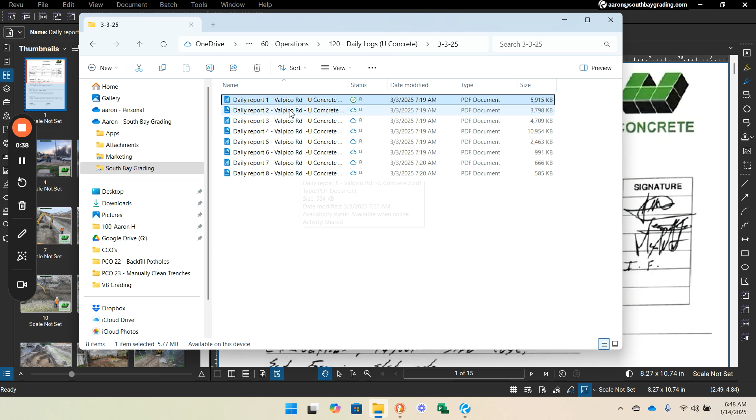It was an 8 working day job. He gave us a tag for every single day, labeled by work day, which is great. Here's his sign-in sheet - he's got the date, job number, names of employees, times in, times out, and employees signed.

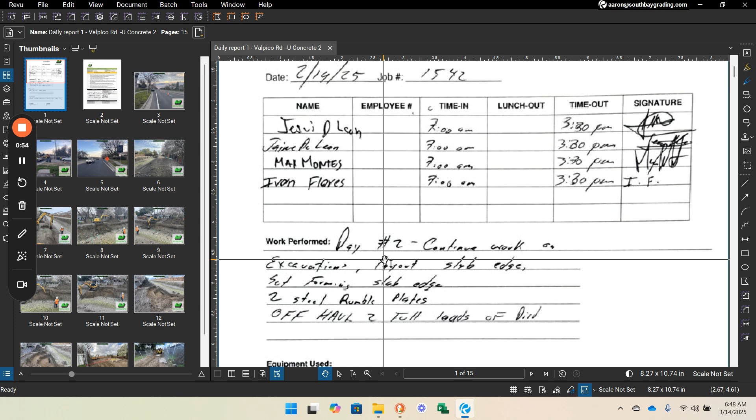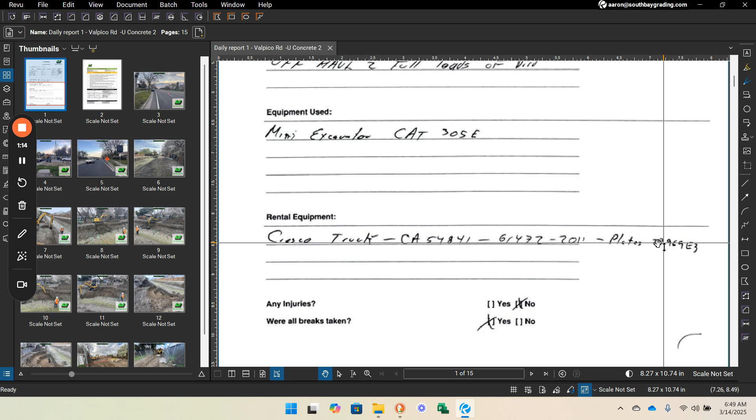This is work performed: continue work on excavation, layout slab edge, set form slab edge, steel rumble plates, off haul 2 loads of dirt, mini excavator. So he's got what he did, what type of equipment he had out there, and his rental equipment - he even puts the plate number on here, which is great.

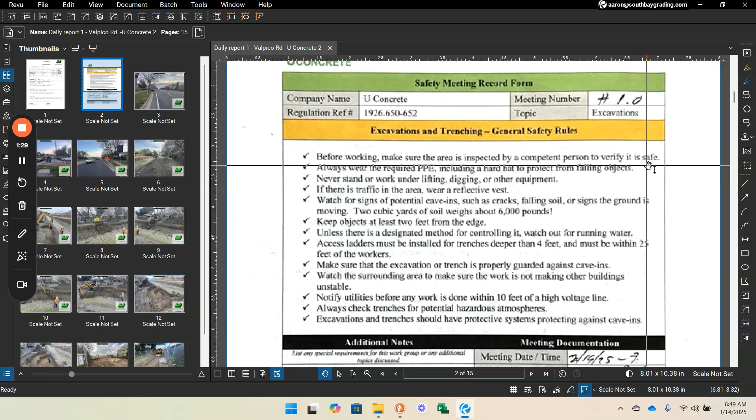Injury checklist, breaks taken, and here's his safety meeting right here. He went over excavations and trenching, which is relevant for what he was doing that workday. Meeting time and date, additional notes, all the guys signed it, and then he's got photos.

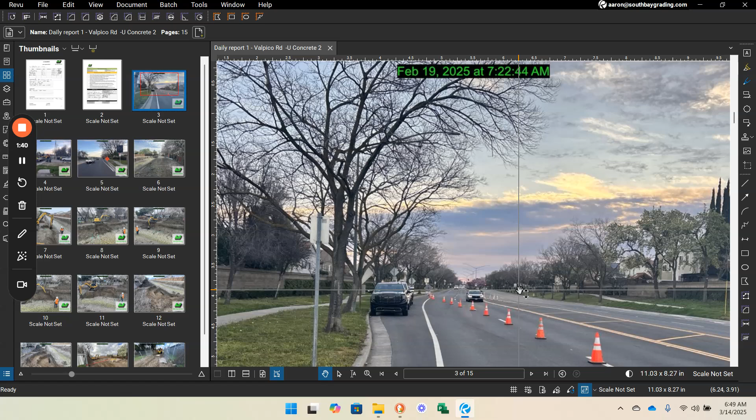So here's Valpico Road in Tracy. He's showing that he's got cones for a lane transition, bringing his equipment in - getting you everything you need to know.

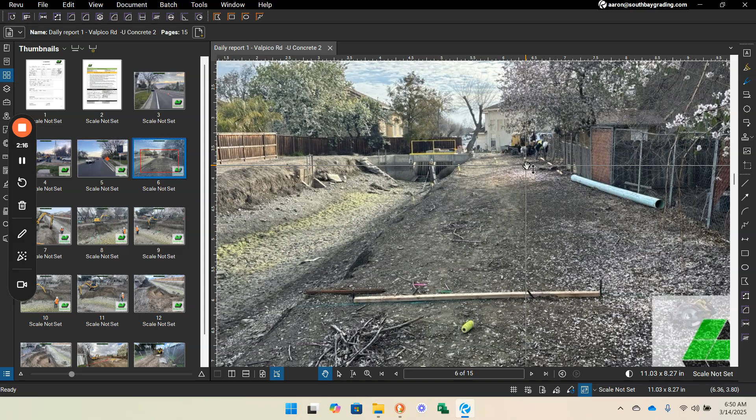Here's his area where we put basically one of these guys in right here, and then the drainage pipe. So when this thing fills up, water is going to flow in here and go across the street. I didn't have the plans, but I think they're basically going to use this rainwater runoff to feed the lakes over at the housing development across the street, which is kind of cool.

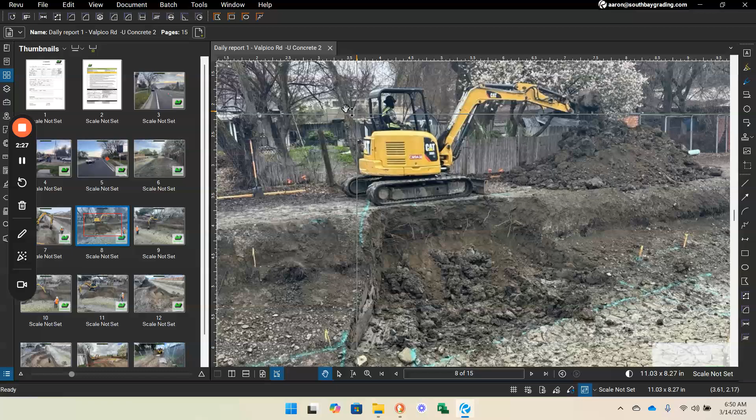So here's his guy cutting the slot out for the trapezoidal shaped intake structure. Hard hat, vest on - you can't really ask for much better than this.

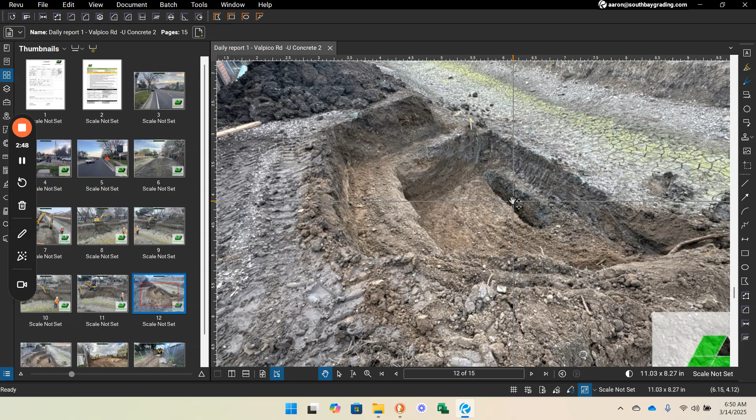Digging - hard hat, vest, got a guy down there checking the grade. And there's his slot. This is the footing or the slab, this is the footing hole, and then the walls come through here. So he's basically got his rough cut done in one day.

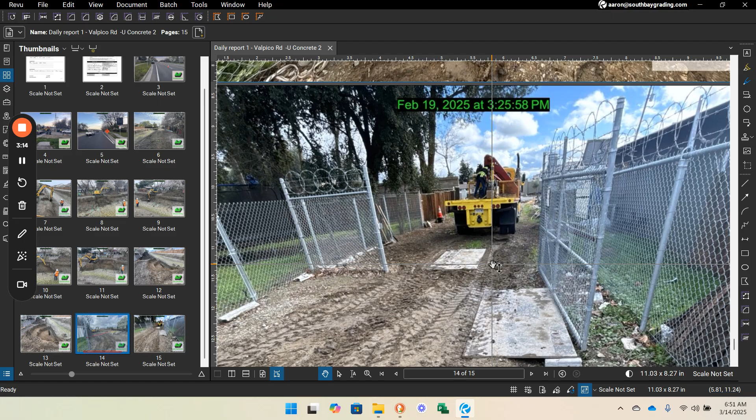He puts up some danger tape and steel plates over where USA marked some utilities coming through, so his equipment and delivery trucks have less chance of crushing any existing pipes. It's always a shame when you damage something that's out there and you have to go in and fix it - no one figures money in their budget for that, so it comes right out of your profit margin in the end.

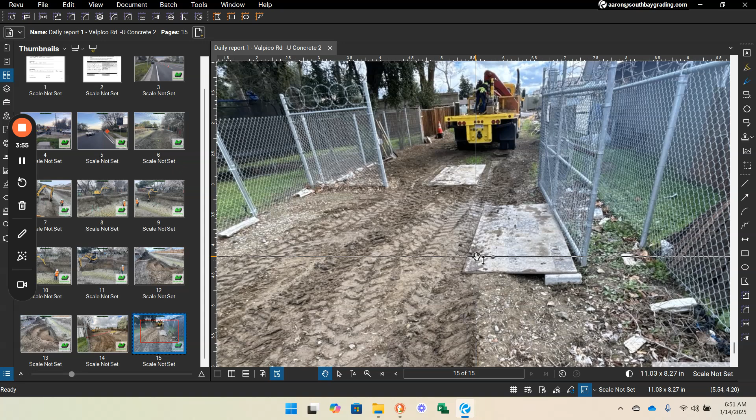If you don't know what USA is, that's the 811 call-before-you-dig, Underground Service Alert. Anytime you're on a job, you need to mark the perimeter for USA, and they'll come out with their locators - PG&E, water, gas, fiber, electric companies - and locate their utilities, spray paint them, so you have an idea of where everything is. They will only do the off-site, meaning stuff in the public right-of-way.

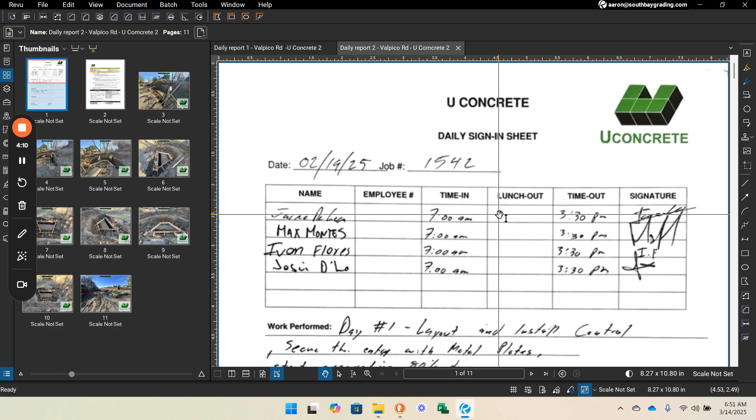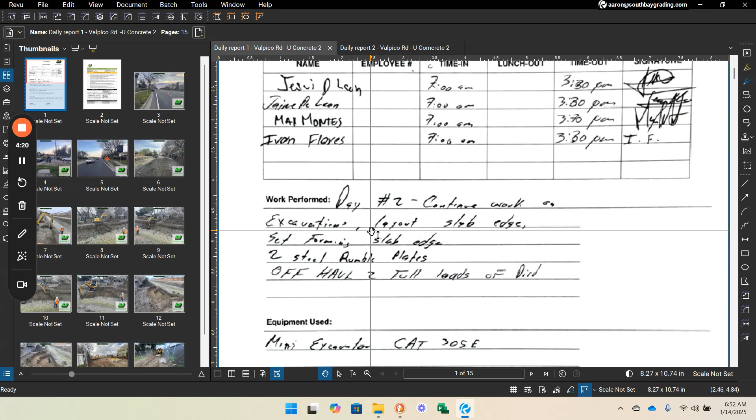Here's the next day of work, same thing. I think these ones are out of order - this says day 1, this one up here says day 2, so he just mislabeled them. I'll give him a break on that because I know what I'm looking at here.

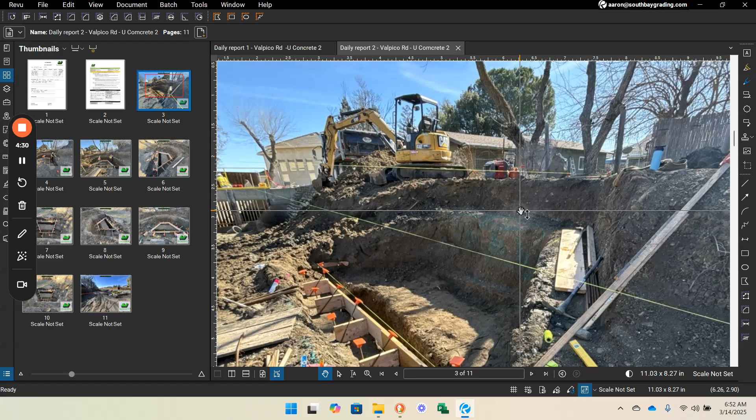He's got this actually as day 2, so he just mislabeled it on there. Yeah, because this is further along.

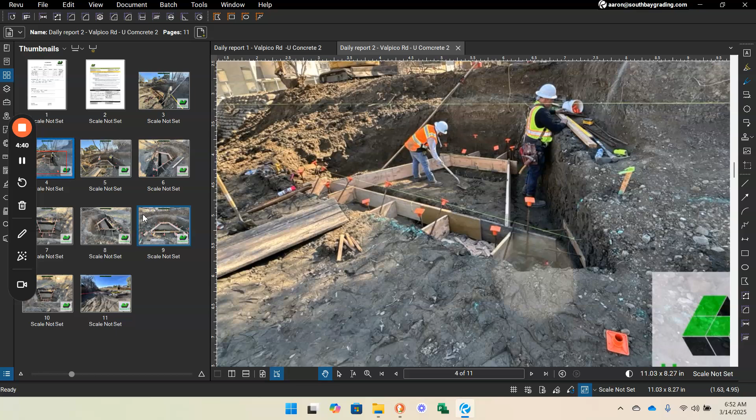Either way, we did this job, we contracted this job out to U Concrete, and I think Sean and I went out to the site a total of 4 times combined. It was a really hands-off job for us. I probably spent about 20 hours procuring some materials, in the pre-construction phase and going through submittals with Jaime, making sure he had all the info he needed, and it turned out pretty sweet.

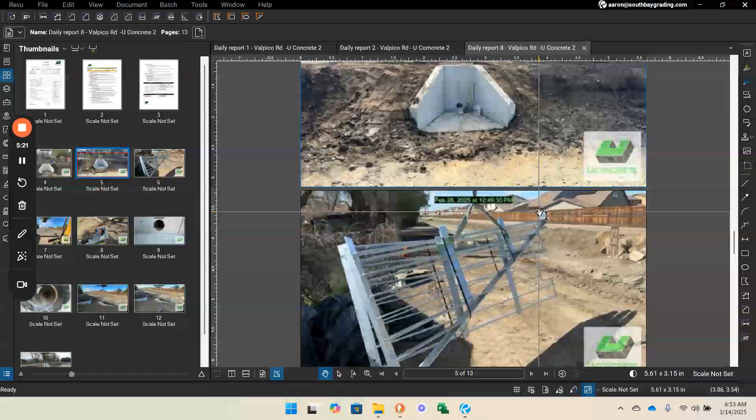Here's the final product right here. So, bam. There's the trash rack that goes on it. So he's got here, right here is a lift.

It's a, what was that thing called? A gate valve. So this thing goes into this wall right here, and it has a little knob on top, and it opens this thing, and then the water can flow in. So you can shut it off and open it.

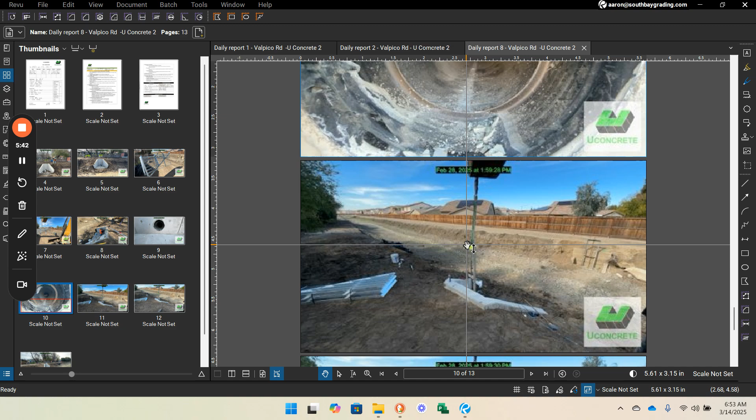So there he is, putting the gate valve in place. There's the gate right there. See, here's another example of one. And then he threw the trash rack on and called it a day.

There's your example of dailies. Super important, especially if you're trying to figure out what you did a month ago. It's super valuable to be able to look back and go, hey, no, Mr. Owner, we were here on this day and I had this equipment out there. It really helps with change order negotiations and just kind of keeping track of your schedule, because it's easy to get lost.

All of a sudden you look up and 2 weeks went by, and I don't know about you, but I can't remember what I did 2 weeks ago unless I look back through emails and go back through my notebook. So memorializing it with dailies, super important.

In general in life, if you don't have a little notebook that you carry around with yourself, you know, I just go day by day. Every day I come into the office, I have a notebook. I'd write the date at the top, and then for each project I'm working on, I put a header as items come up, whether it be project X, Y, and Z.

And then I just start writing a checklist of stuff I have to do with a square to the left of it. And as I get that stuff done, I check it off, and then the next day I move that stuff over to the next list. There's software that will do that for you, but it's always nice to have a book because you don't have your computer on you at all times if you're out in the field.